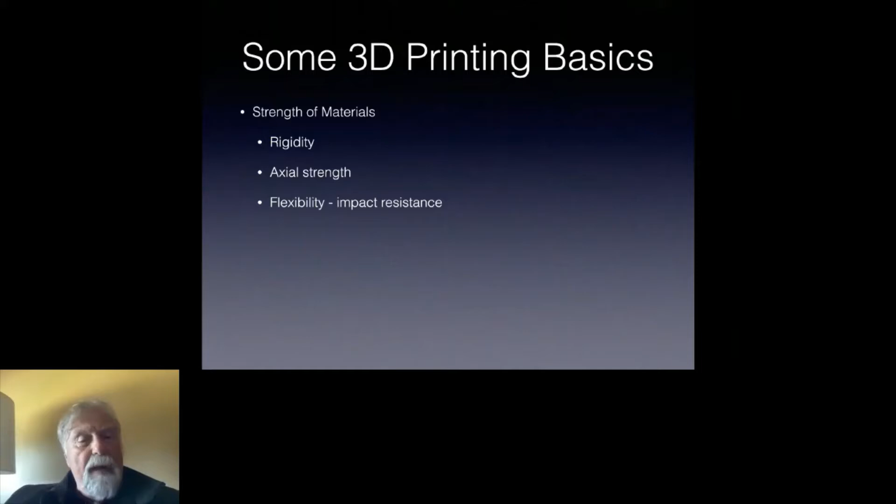So some 3D printing basics. Core of it that I've learned is strength of materials, particularly about the rigidity, particularly axial strength for rocketry, and then lastly, flexibility for impact resistance when they inevitably come down.

Second key issue is the glass transition temperature, which is the temperature at which we see the beginning of heat deformation and the loss of structural strength. Key to this is material selection.

One of the insights that I discovered in my research, and getting myself less stupid about this, was that for many of our easily accessible materials, the glass transition temperature is about the same as that of the epoxy resin we use in our fiberglass and carbon fiber composites, which means we can use these advanced plastics in many of the same places, modulo strength, that we can use fiberglass and carbon fiber.

And last, there's some fascinating things we can do with tuning the slicing parameters. I'll talk about slicing a bit later.

So my 3D printing experience - first of all, I am not a mechanical engineer. I've just done this for 30 years, and I'm a very technical person.

So I started this experience with a low-cost printer, and what I found is that it was too much work. The printer became the hobby rather than the tool for the hobby I was doing.

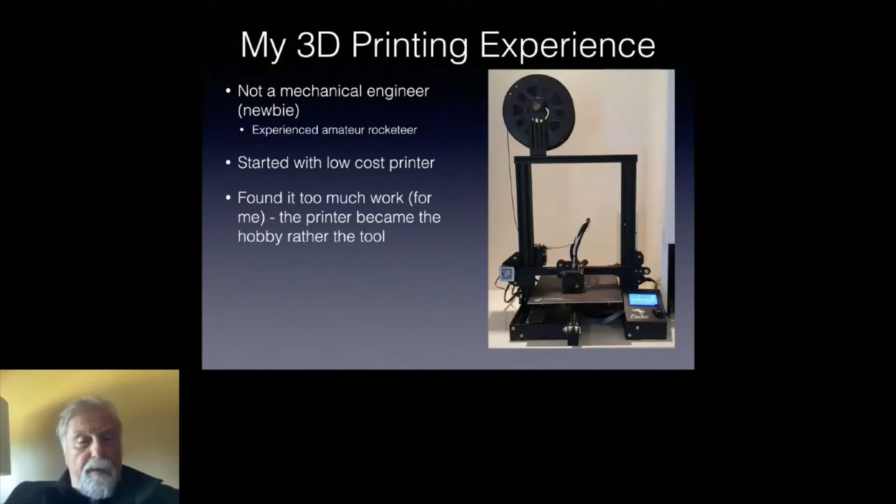So I upgraded to a more thoughtless printer, more expensive, that prints stronger materials. This in case is a Dremel 3D45, in which I can print things like ABS and PETG and nylon. And I particularly am a fan of PETG.

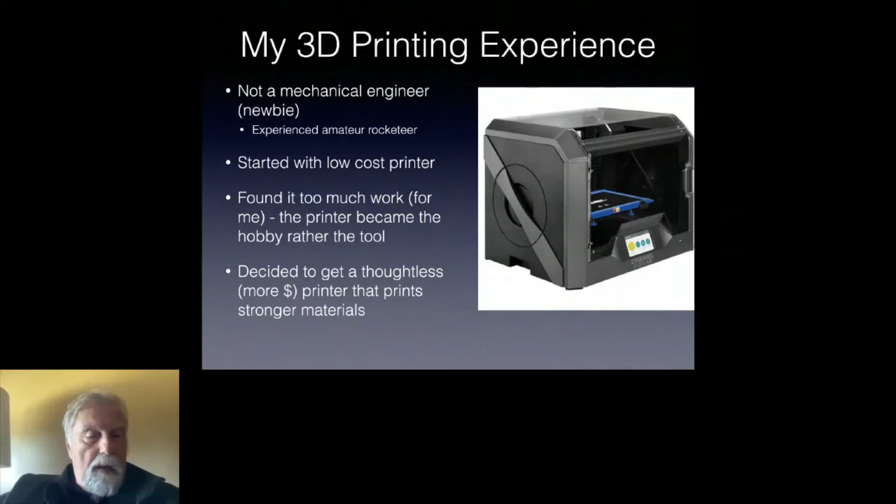And then I have a gracious spouse, so particularly in COVID, when my house gets filled with 3D printed rockets - this is a portfolio of about 1/150th scale of just about every commercial rocket that's been around. I'm particularly proud of the N1.

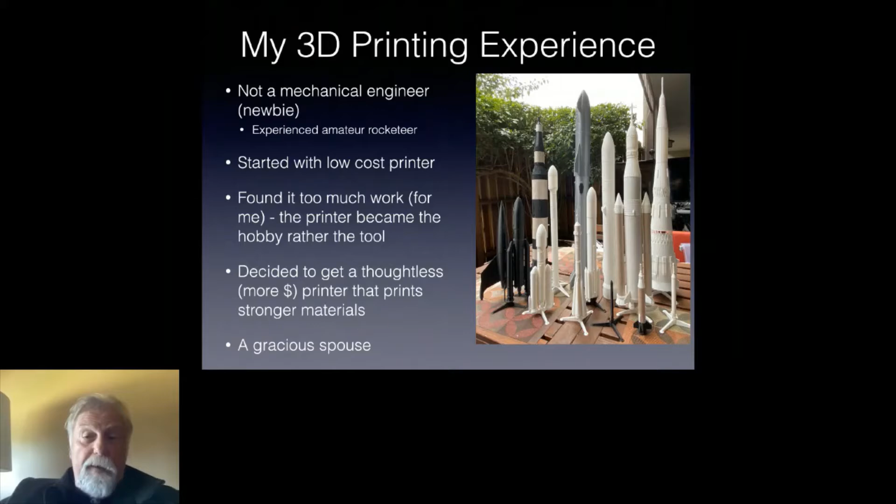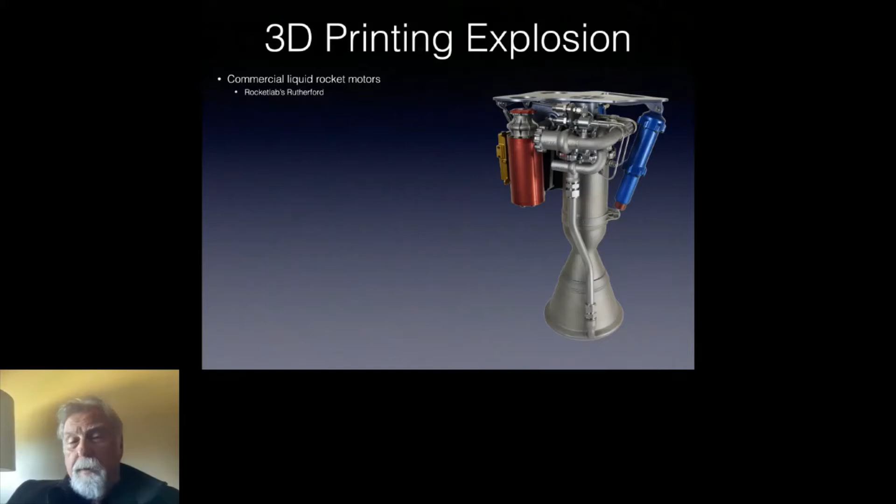So 3D printing explosion - it's here. We're now seeing commercial liquid motors that are completely 3D printed. This is Rocket Lab's Rutherford motor.

We see entire commercial orbital class rockets that are being essentially entirely 3D printed. I particularly point to Relativity's Terran 1, which has not yet flown, but should - my understanding is it's about 90% completely printed, and we're looking to think about a first flight soon.

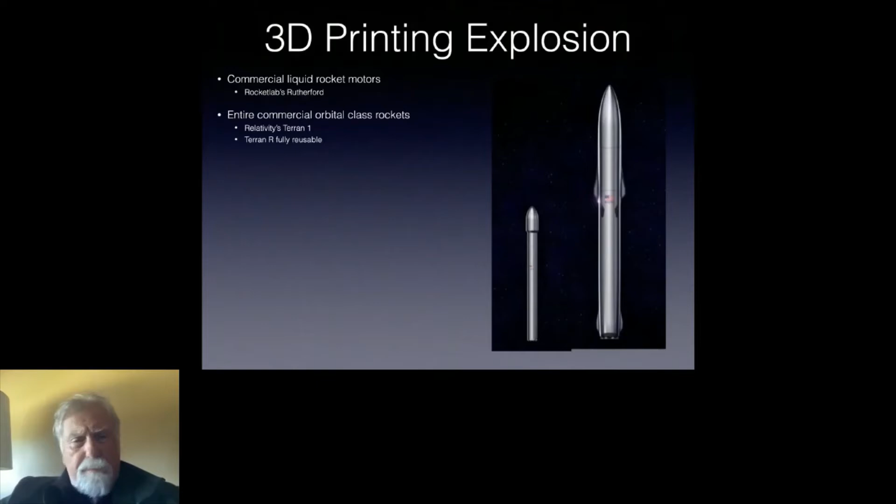They've already announced a successor product, which will be the Terran R, which is, as you can see, about a 50% downscale clone of a Starship, a SpaceX Starship. And they assert that they're going to completely 3D print that as well.

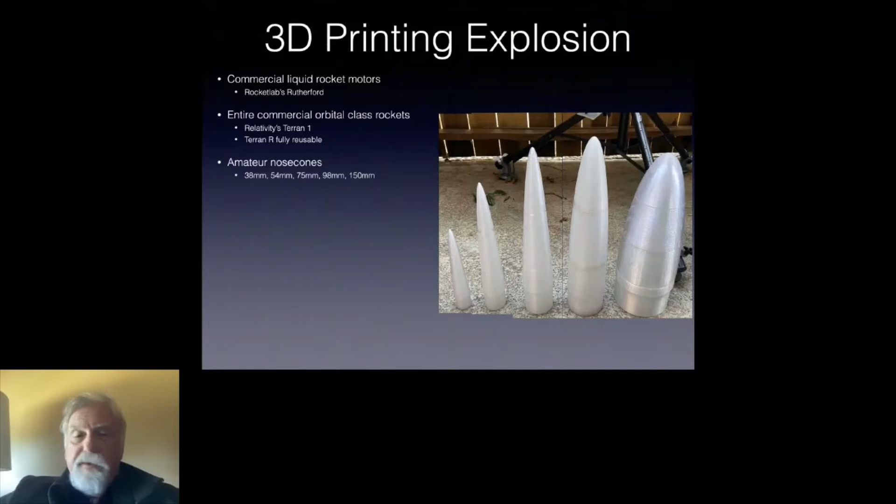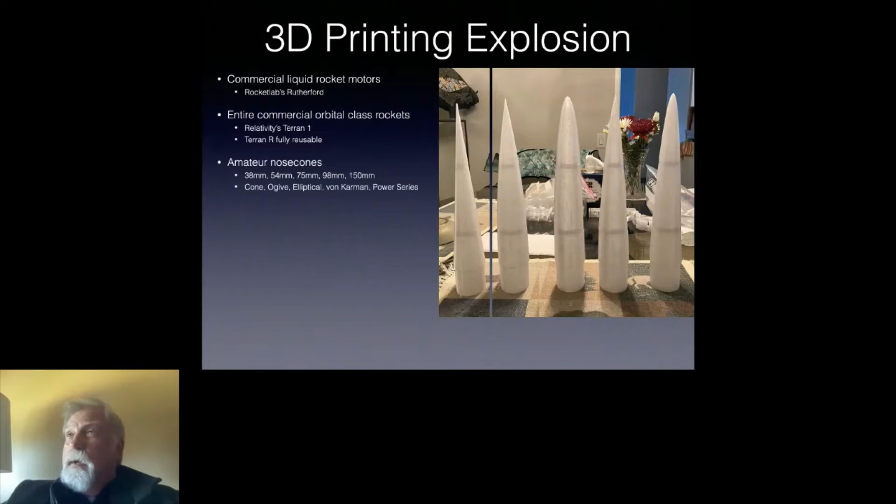For me, I'm finding that I can print amateur nose cones of any size that I want - a portfolio here of 38 millimeter up to 150 millimeter. I can print them in just about any shape that I want, so I can pick the shape appropriate to the drag environment of the flight profile that I'm looking at.

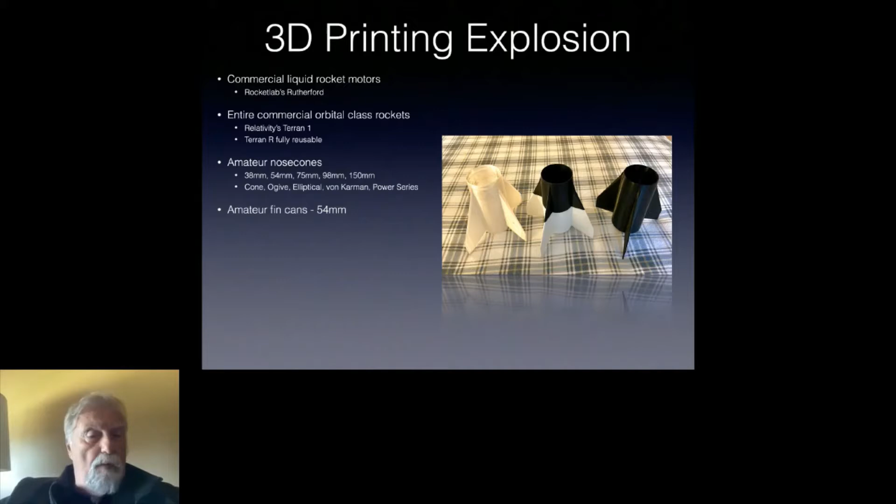You can build avionics mounts, and that's probably the first thing that people have been building with 3D printing. These happen to be high performance ones - these are the 3D printed mounts for our ARLO Extreme sounding rocket that's really targeted in the 150 to 180K range, Mach 3.5.

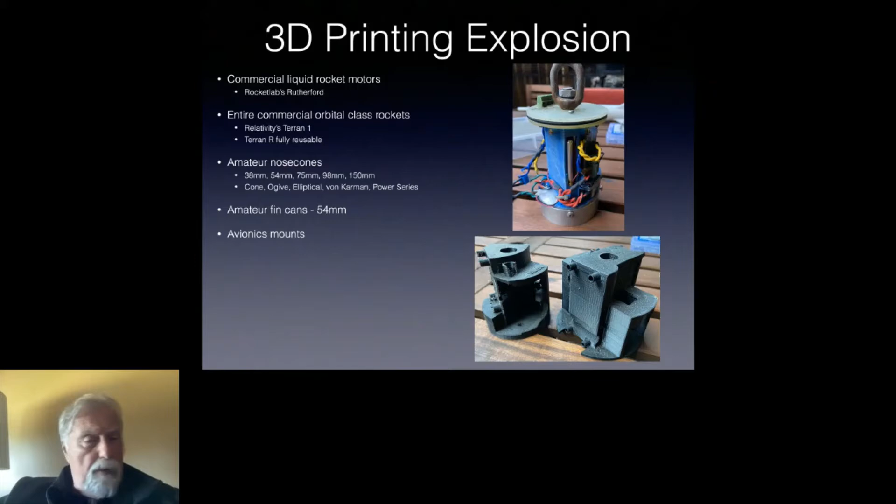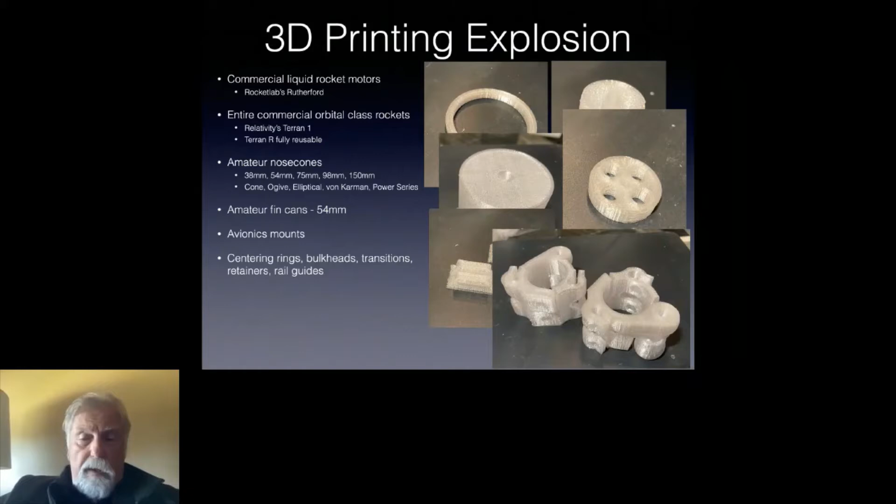You can build centering rings, bulkheads, transitions, rail guides, and I'm fascinated - in the lower right there you see a wonderful design for a flyaway launch system. This is my test bed for kind of Mach 2.2 plus flight, looking to instrument to measure interesting things about temperature and strength.

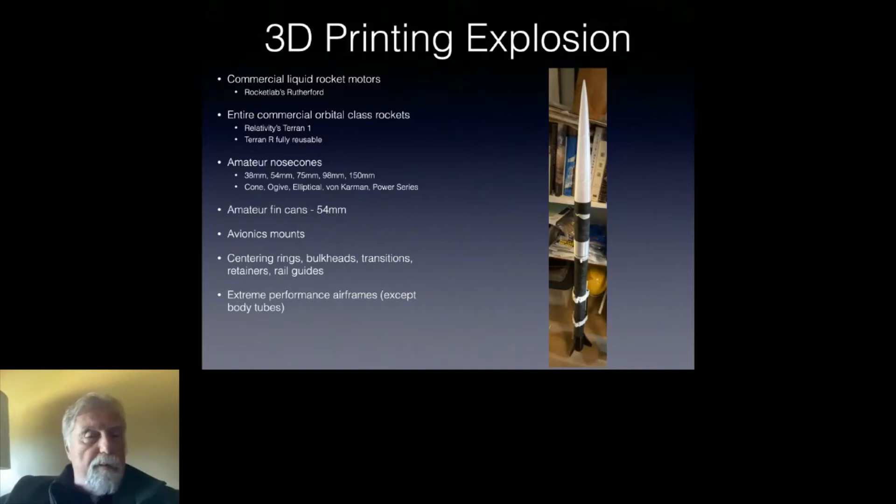And then you can build crazy things, like I found a design that someone had done for a 24 millimeter motor mount for a lunar lander. And of course, once you can do one size, the cool thing is you now can scale them to all other sizes. So that's kind of been a COVID hobby, shall we say.

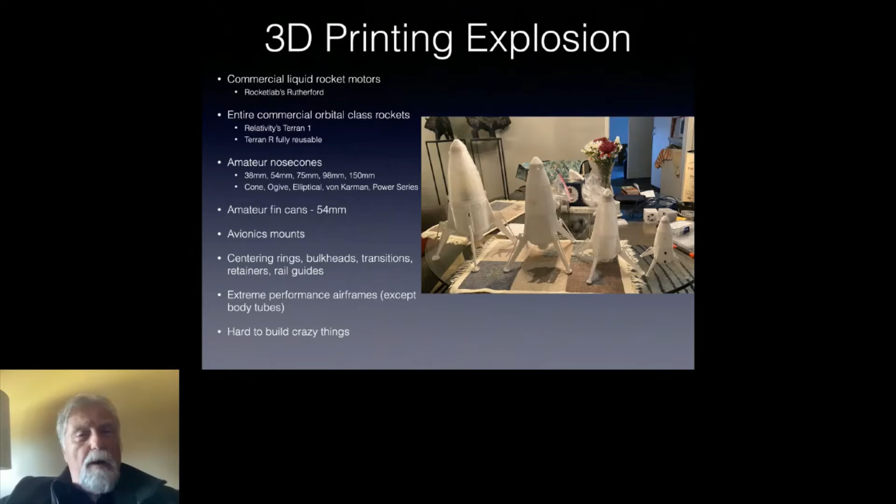So the core technology accessible to amateurs is called fused deposition modeling. You can see hopefully a video on the side of my printer physically printing out a complete airframe, and it does it by layers of extruded plastic.

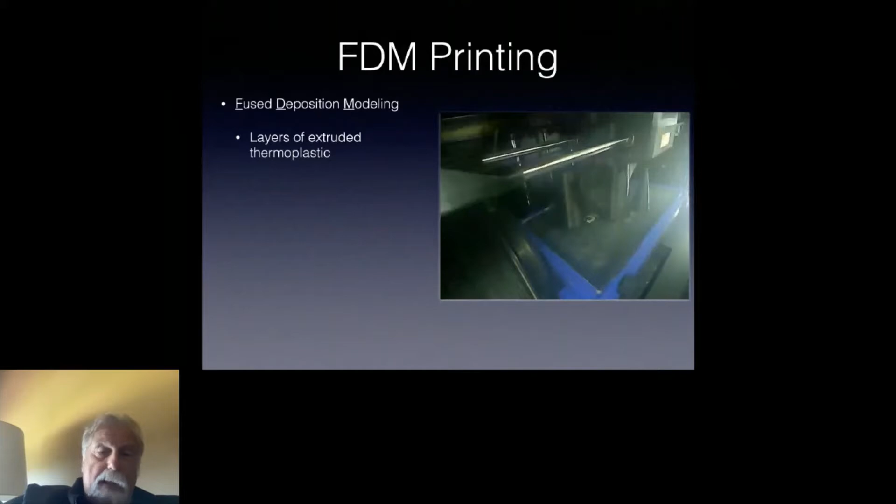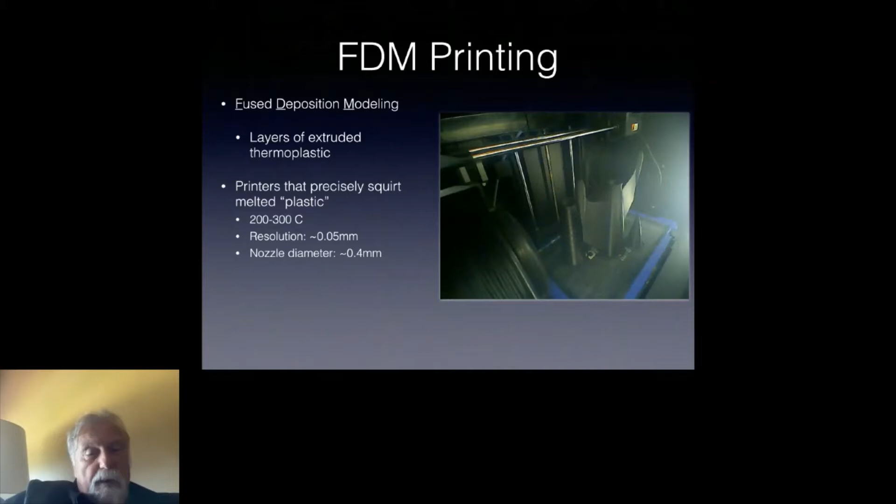You can see the print platform moves in the Z direction, and the print head moves in the XY direction to essentially print extruded thermoplastic. The plastic varies in materials, generally between 200 to 300 degrees C at the print head, with a resolution on the order of 0.05 millimeters, with a nozzle diameter, so a feature size of about 0.4 millimeters.

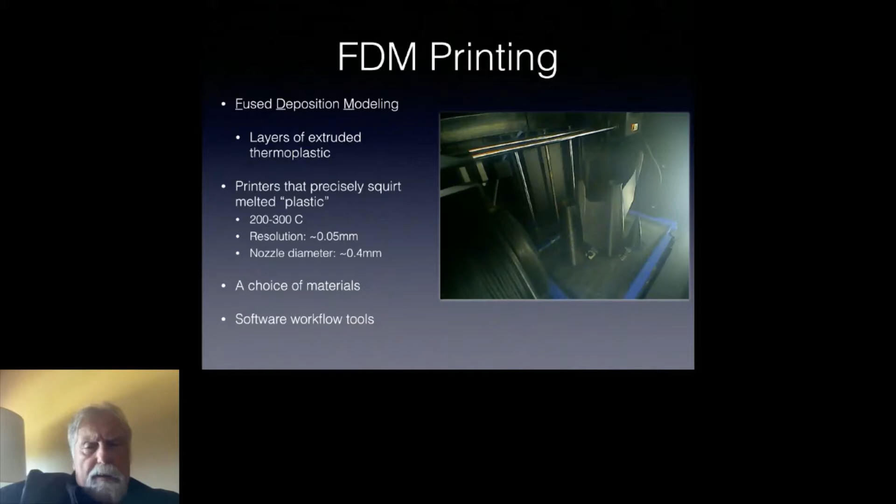There's a huge choice of materials - I want to talk about that in a moment. And there is a robust collection of software workflow tools that allow us to build, like we do doing software development, to build a system from imagination out to concrete parts.

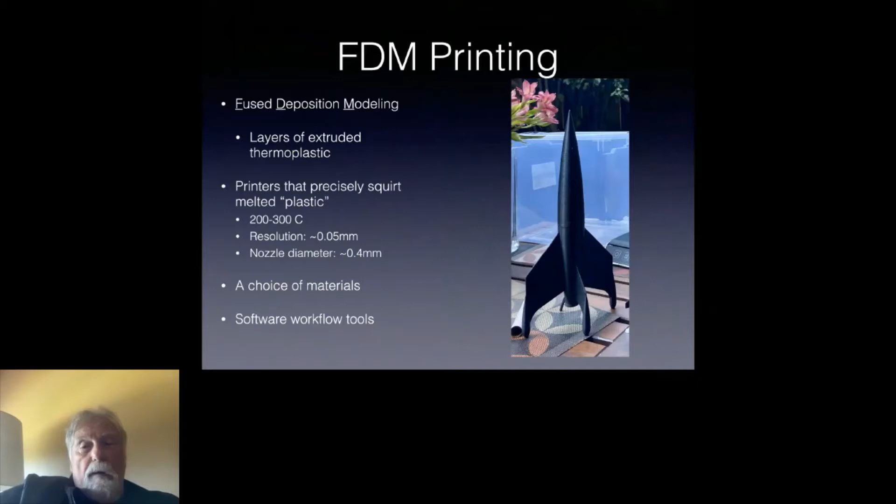And that was the rocket that was just printed, which is roughly a 1/150th scale model of the famous Luna from Destination Moon. So the materials are the key issue - now, much of 3D printing, at least when I first was a naive person, was just simple plastic, PLA.

I don't find PLA particularly useful. Rather, I think there are some amazing materials. I'm particularly a fan of PETG, ABS, what's now called PLA Plus, nylon, and polycarbonate that can be printed in generally reasonably accessible printers. These, I think, are widely useful in a variety of rockets up to and including some parts in even L3 rockets.

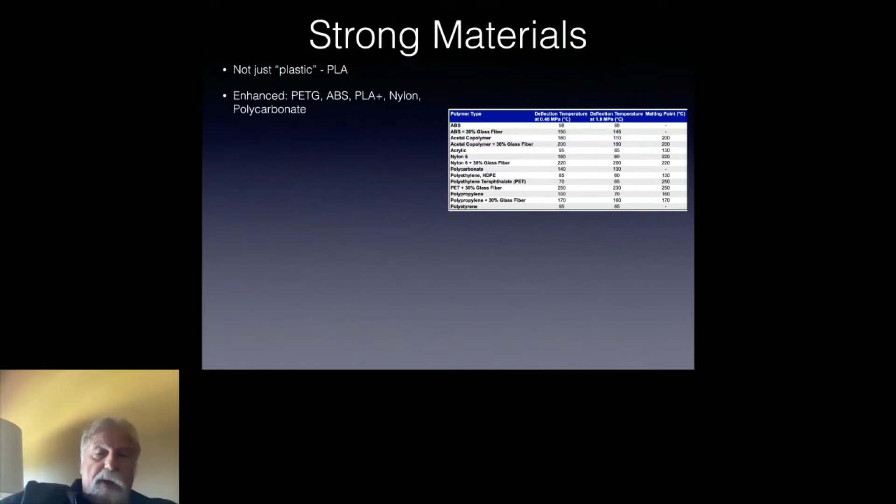What's even cooler is we now have reasonably accessible materials. I'm particularly a fan right now of Onyx, which is a proprietary material from a company called Markforged, which is a nylon base with chopped carbon fiber, and optionally you can add continuous carbon fiber. Their measurements suggest that they're approaching strength, certainly in certain axes, that is kind of on the order of aluminum. And of course, for aesthetics, you can find materials that are impregnated with wood, metal, colors, fluorescence.

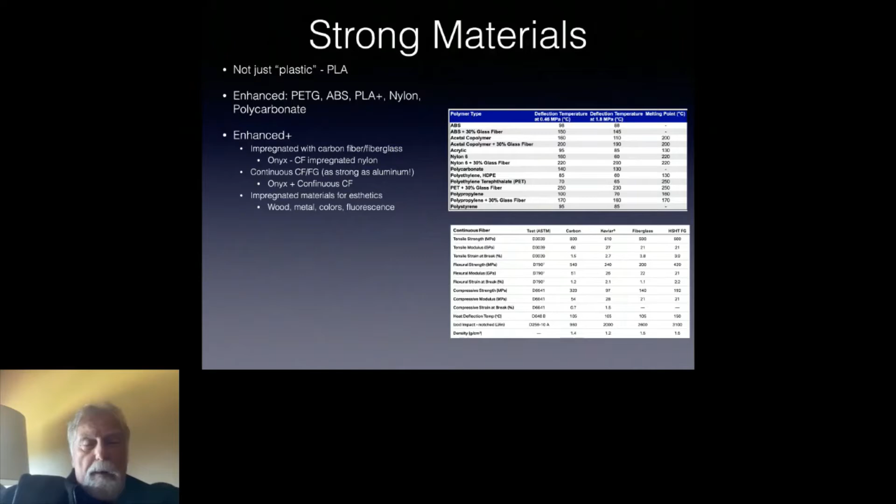I'm sure there are things I don't even want to think more about. We can find flexible materials like TPU that allows us to build gaskets and shock mounts. I've used this to build gaskets for a waterproof outdoor telescope.

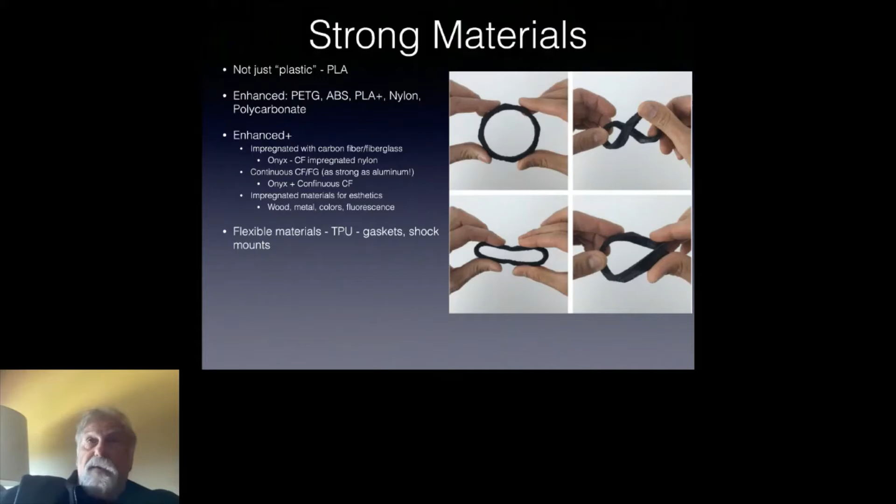We can use the same design in essence, but scaled up using laser sintering of carbon fiber in a product called WindForm, which allows us to take our designs and be orbital capable. So we can take a design that we build to launch on the ground, either at something like Spaceport America Cup or my launch of ARLO, and then scale it to put it into orbit.

Since most of the electronics are now, particularly for LEO, we can use commercial grade electronics. The payloads on the bottom, the circular one to the upper left and the central one at the bottom, those are payloads that I put up about 3 years ago. They're made out of WindForm.

The payload on the top was a test payload for LEO using LoRa, the new communications protocol. That was carried in a carrier. The carrier is at the bottom, and it deployed 2 of these essentially CANSAT-sized systems when launched off the ISS.

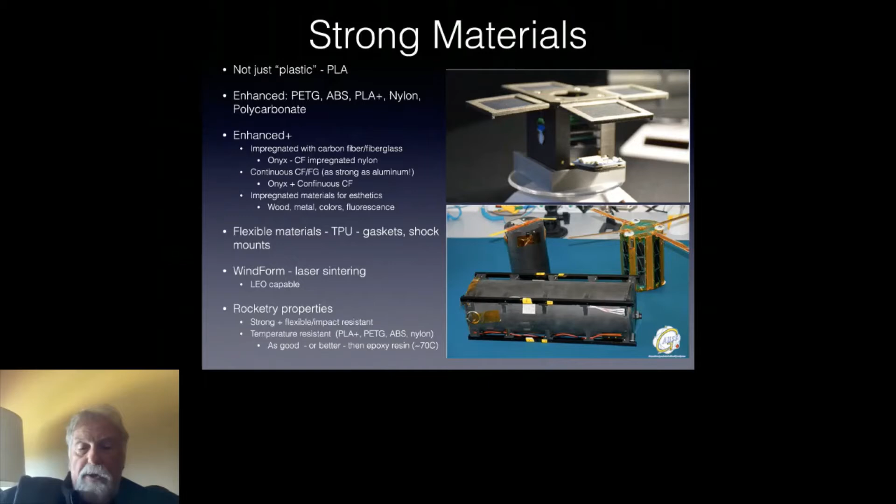So what have I learned about looking for rocketry properties? You want to be strong, you want to be flexible and impact resistant, and you want to be temperature resistant, at least to the same degree that our epoxy resins are temperature resistant. What I've discovered is that there are a number of these: we can use PLA+, PETG, ABS, nylon, and they end up being as good or better than epoxy resin.

What are the limits? Well, it's generally heavier than balsa wood and paper, so at the very low entry level of beginning rockets, it's going to be heavier than what we've used for wood and paper, but it's ultimately lighter than fiberglass. I find that I'm bounded by the print volume, and biggish objects must be printed in pieces and then use adhesive to bind them into a bigger piece. I think that's ultimately a weakness, but I haven't yet been able to fully explore that.

I think some of the materials, I'm going to talk about our advanced project in the area that crosses into the strength of aluminum, but for many projects, PETG, I think, is good enough, as I said, for temperature resistance, and I think for strength.

One of the challenges is that most of the printers we have take a long time. So that 54 millimeter print can I showed earlier can take a day. And we're now printing in Onyx with continuous CF, a two-stage interstage that will stage at about Mach 1, and the upper stage will go to north of Mach 3. That interstage will take a little over 2 days.

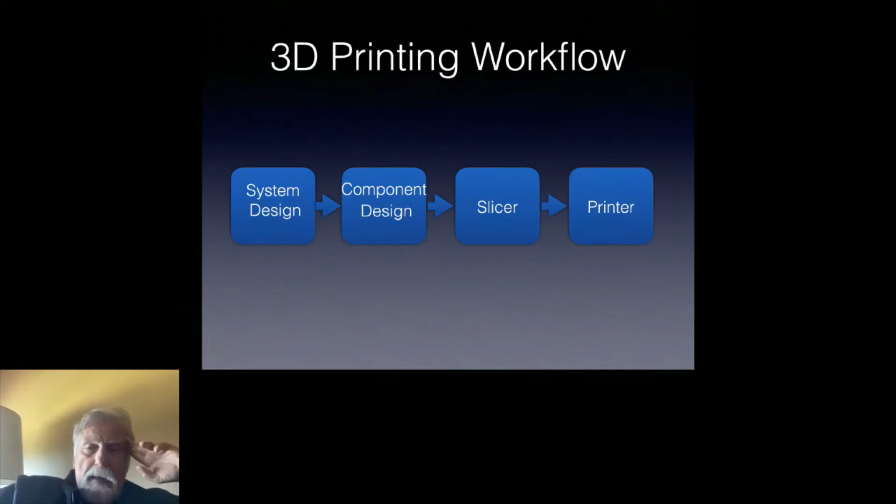So what's the workflow? Like in many of these systems, we start with a system design, and we have a set of tools for designing the complete rocket and the complete system. That then breaks down into looking at individual components - centering rings, fin cans, nose cones. We then take those and put them into a step called a slicer, which takes the 3D object and slices it into horizontal layers that can each be printed by the printer. Then we ship that object description to the printer itself, and we iterate until we quickly find ourselves with something that we like in fit, strength, and function.

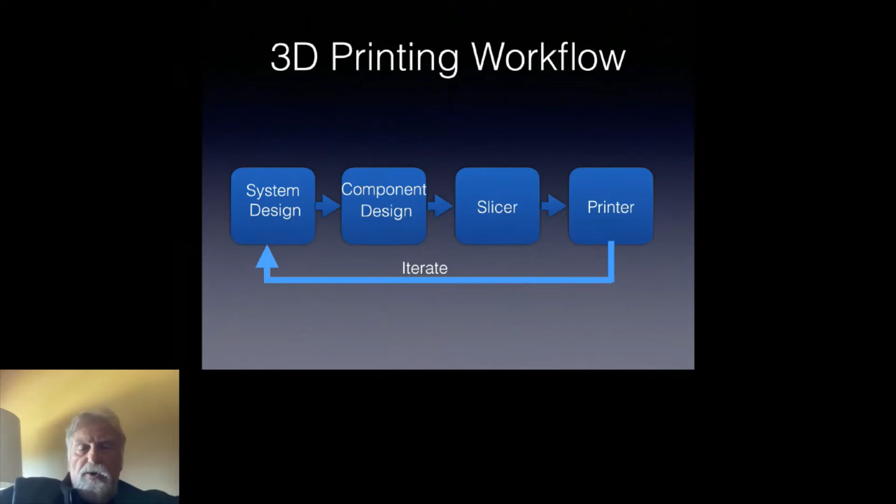So for many of us, many of our students are using OpenRocket, mostly because it's free and it works reasonably well. It has decent simulation accuracy, and it has a decent model for drag, particularly transonic.

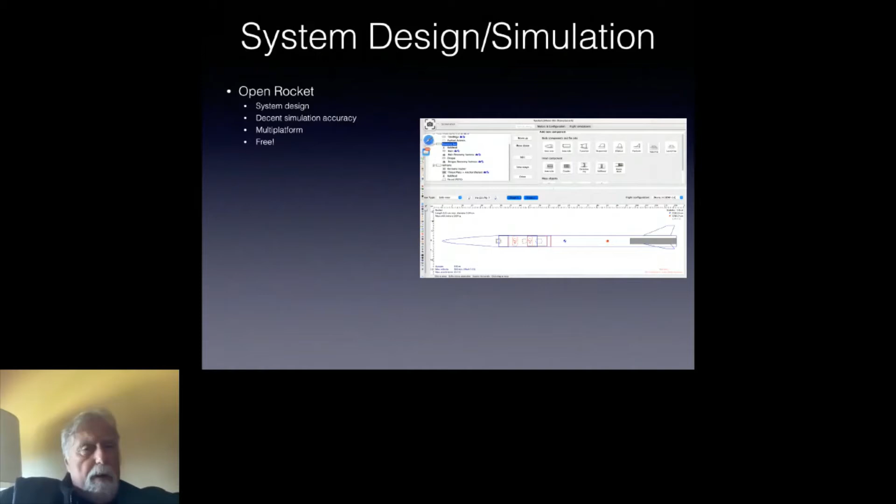The legacy system is RockSim, which I find has poor simulation accuracy. But when you use the product that's sadly no longer supported, which is RockSim Pro, you can add in good drag models.

And it does a really good job of making 6DOF simulations with dispersion diagrams that are really good for FAA.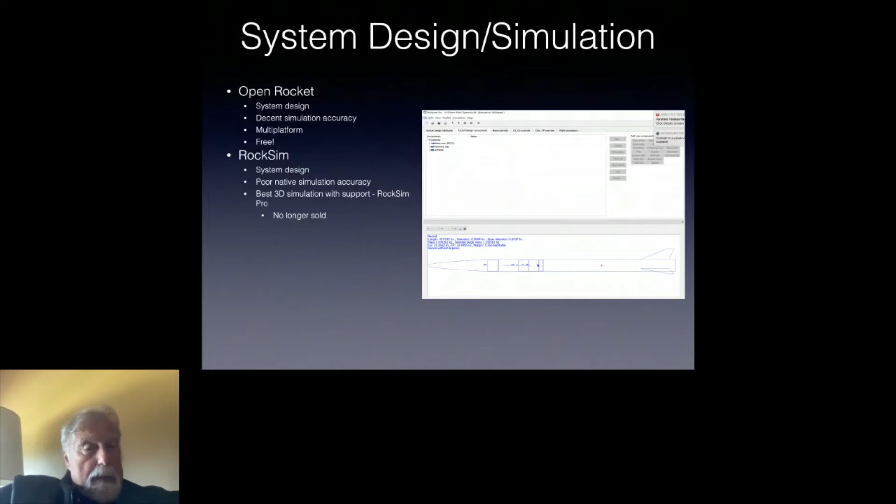And lastly, there is RAS-Aero, which all of us know has kind of an antique UI design, but it has great 1D simulation accuracy and a very good set of drag estimates for most rocket designs.

Sorry, I couldn't hear. Siri is talking back to me, forgive me.

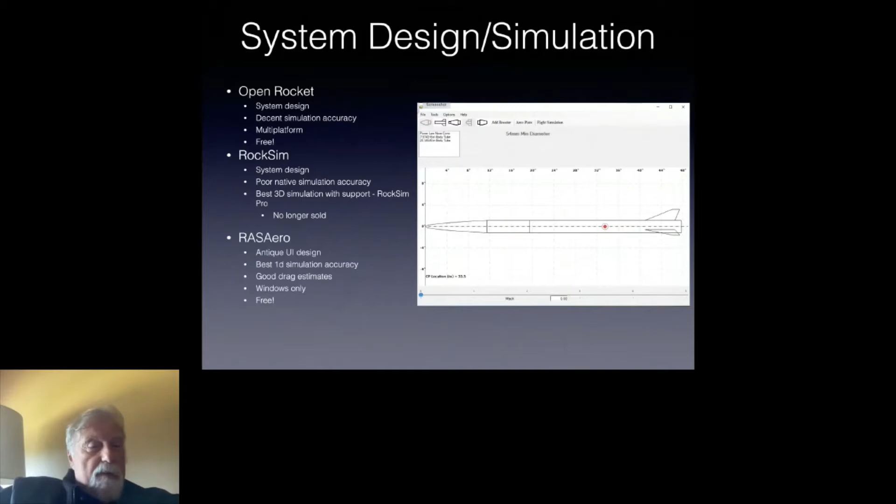And it has a good value in that it's free.

And then lastly, I'm just beginning to put myself into using Fusion 360, mostly because I want to be able to export and do CFD designs.

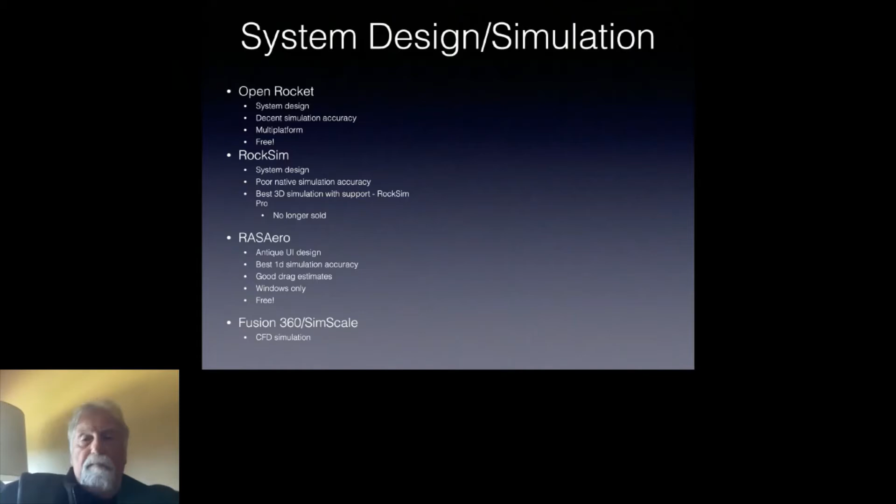Component design creates the fundamental shapes. And so I found that I like to borrow from the best.

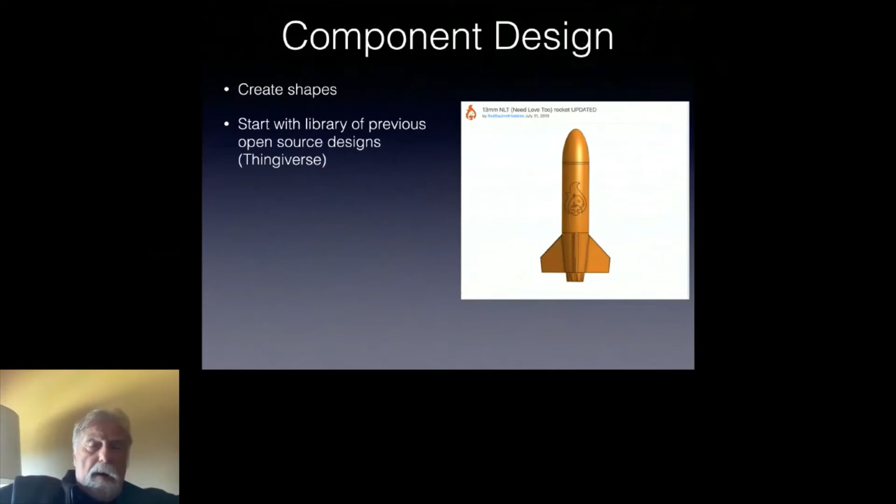I find Thingiverse is actually a very good source of some existing components. This happens to be a 13 millimeter little rocket that is great for teaching in grammar school, which I've gotten off Thingiverse. You can now look at new component design.

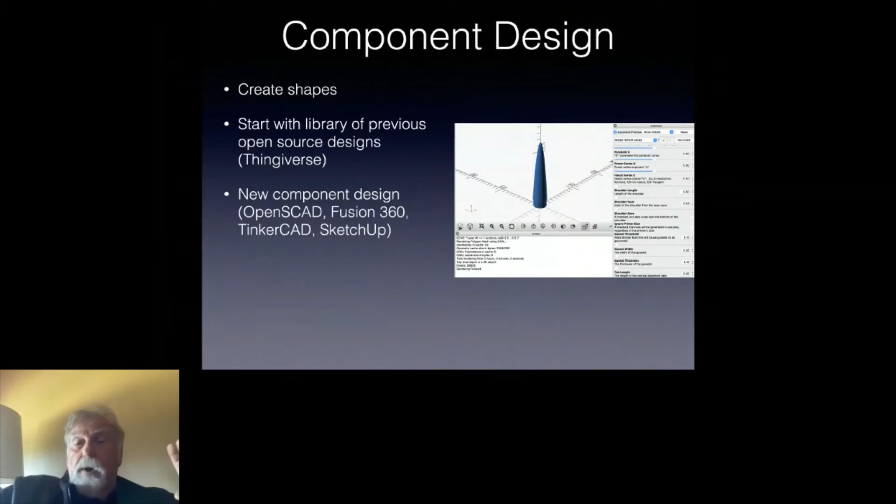I happen to like OpenSCAD and Tinkercad a lot, and you can design a new nose cone. We've now taken that new nose cone and ported all those pieces back into Tinkercad, and now we have all the component pieces of our rocket.

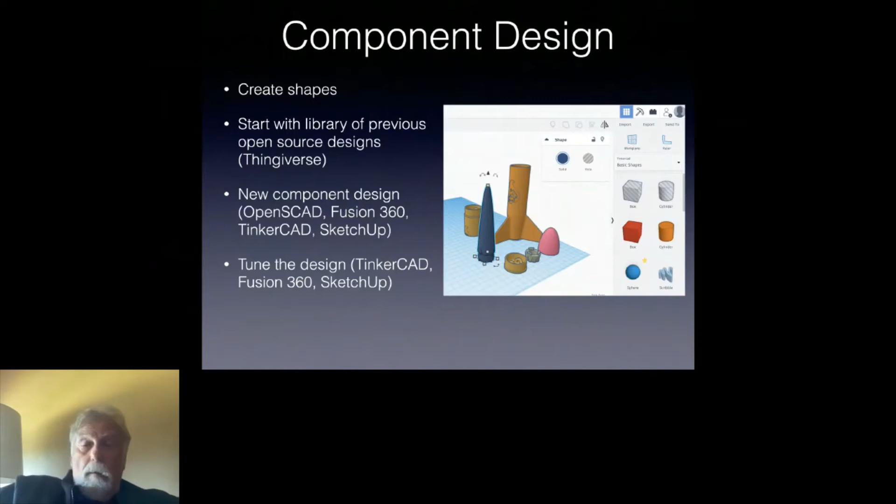We then export those as a .stl design file that will take us to our slicer. Our slicer, as you can see in the animation, then converts our shape designs into printer instructions.

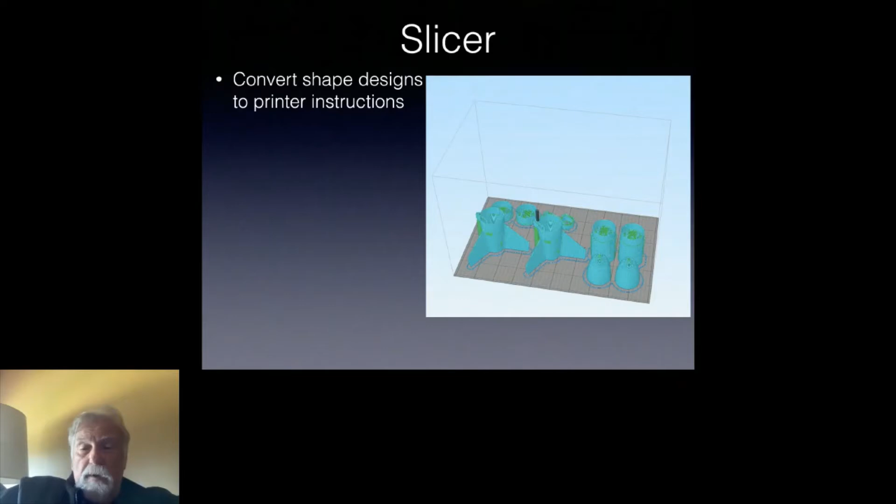It layers the horizontal layers and builds them up, like a compiler for programming is my best analogy. And so here I'm building two of these little rockets.

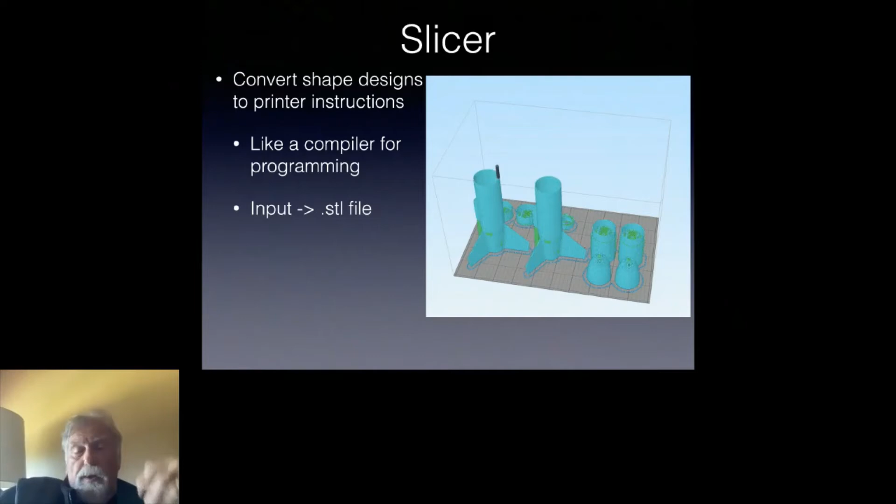The input was a .stl file of the shapes, and the output is a .g-code file which will actually go to the printer. Cura is a very popular slicer. I happen to like Simplify3D.

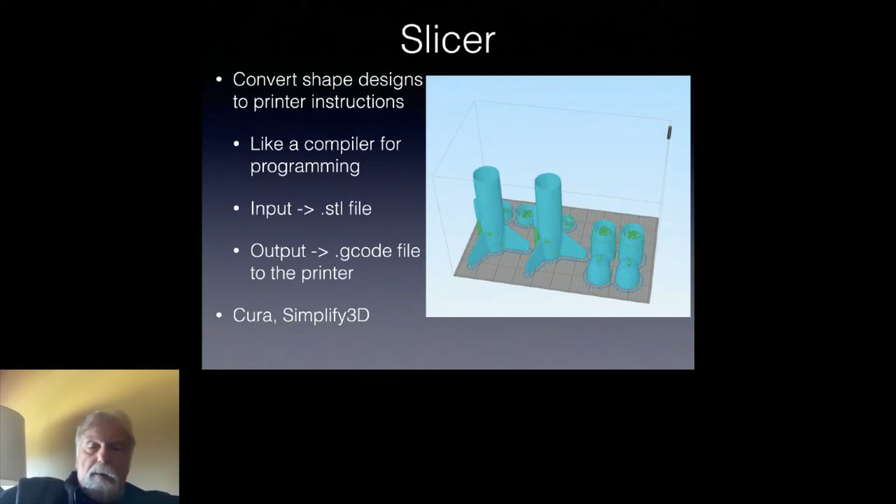So printers, there's a huge wide range of capabilities and prices, and I urge you to do your due diligence as you think about them.

I'm going to talk about really three ranges. The beginning one is at roughly $300 for a Creality Ender 3.

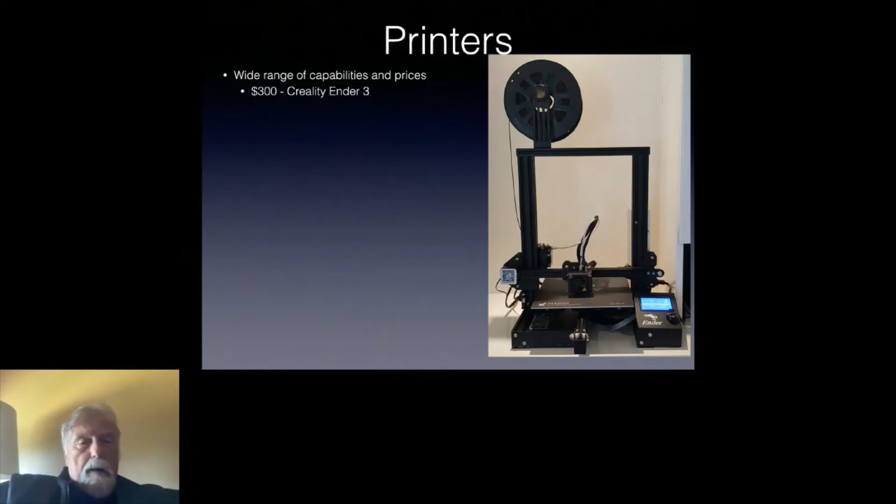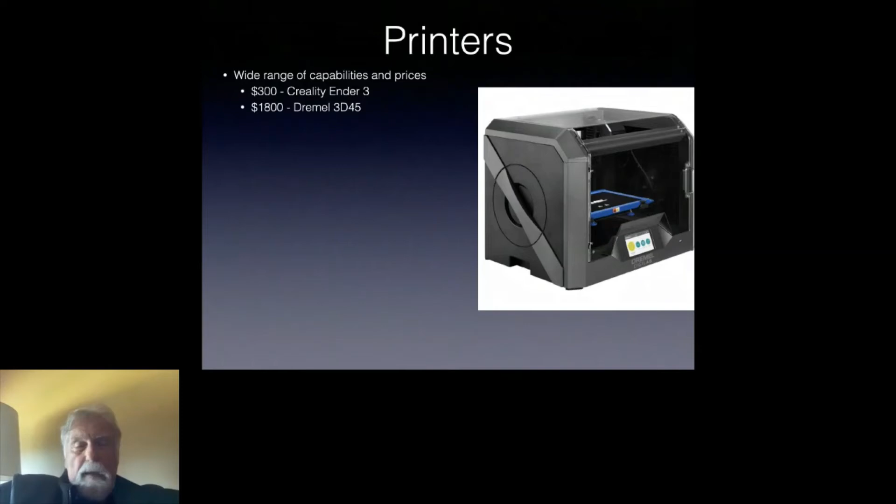And I've then moved up to a Dremel that I really like. It's thoughtless, it works, it's highly reliable, highly accurate, and has a good selection of materials.

And then with my partner, John Coker, we're now looking at and using MarkForged, which begins at about $4,000 going up to about $10,000. We're looking at nylon and continuous carbon fiber, with a strength profile that begins to look a lot more like aluminum.

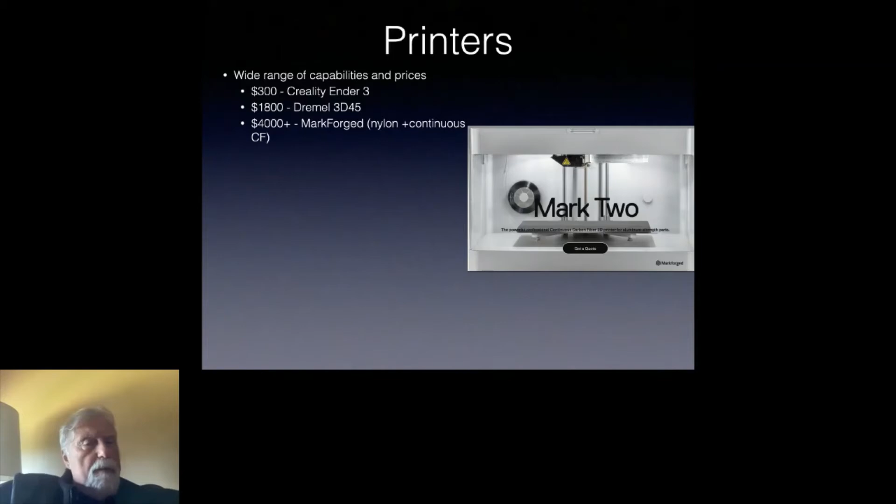And so, some desirable rocketry features. You see the printer here printing those same little rockets.

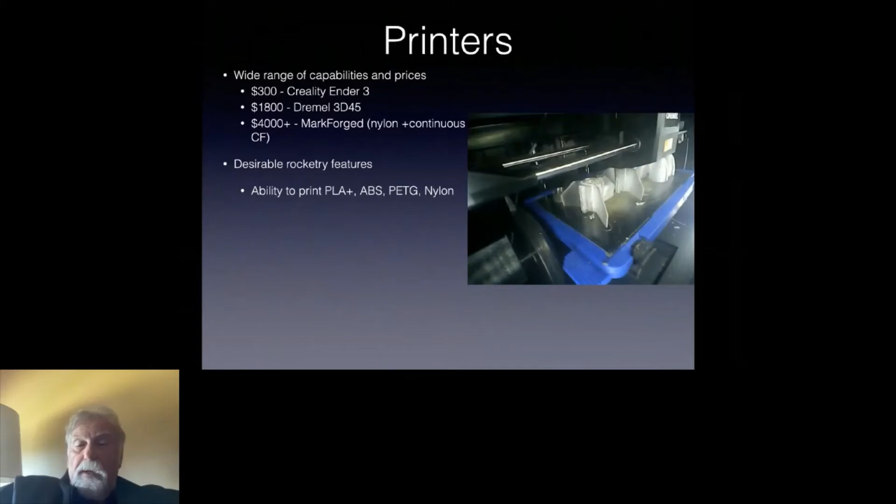The ability to print PLA plus, ABS, PETG, and nylon, I think, is really important, and I would use any of these materials in selected different places.

I would look to have a maximum nozzle temperature at about 300 degrees C. I think a heated printing bed is really valuable, up to about 100 degrees C.

And an enclosed build chamber really reduces the noise and helps keep a more even temperature as you are printing, which helps bonding between layers.

Key thing is the print volume, and the maximum I've been able to print in my printer is 150 millimeter nose cones, sliced vertically, because the length of the nose cone is longer than the build height.

I really like the feature of a self-leveling print bed. Having done both non-self-leveling and self-leveling, I really love the fact that it kind of takes care of itself.

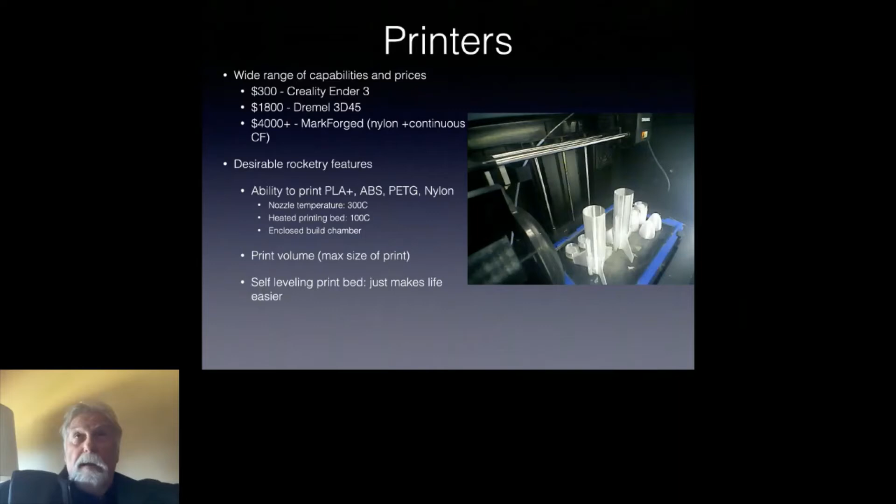And lastly, my printer is network enabled, so with friends and students, I can let other people get access to the printer's website and submit jobs for printing.

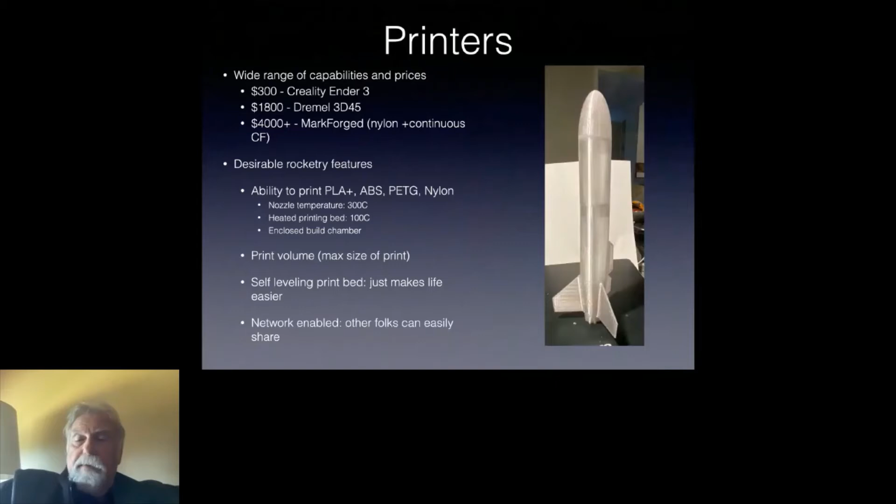Consumables cost. The key cost is a roll of filament. This happens to be a 1 kilogram roll of PETG. I happen to like the brand Overture.

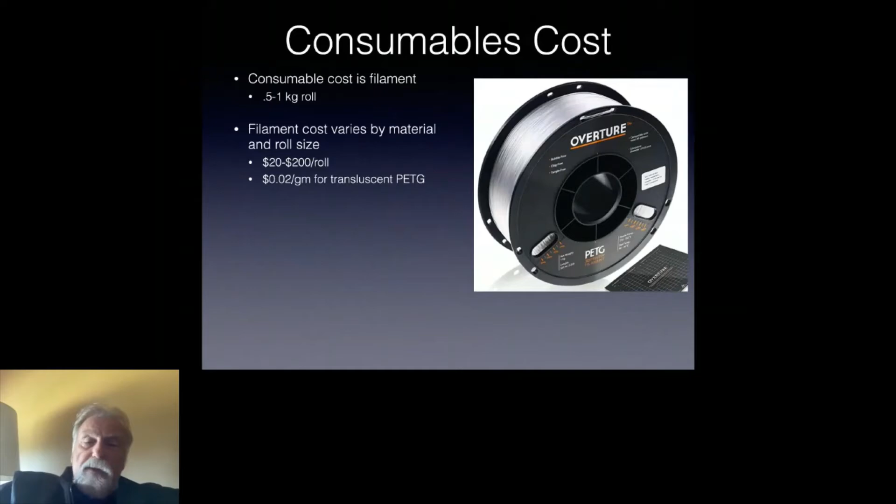Filament cost varies by material and roll size, going anywhere from about $20 up to the MarkForged Onyx material at $200 a roll. But for translucent PETG, as you see, it's about 2 cents a gram for the printed model.

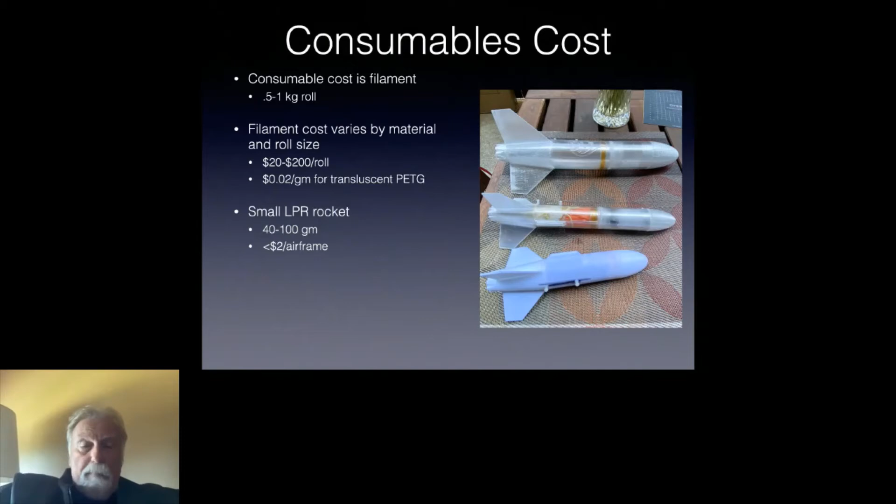So for less than $2, one can print a small low power rocket like the ones we have at the bottom, either payload or not payload, with 40 to 100 grams of material.

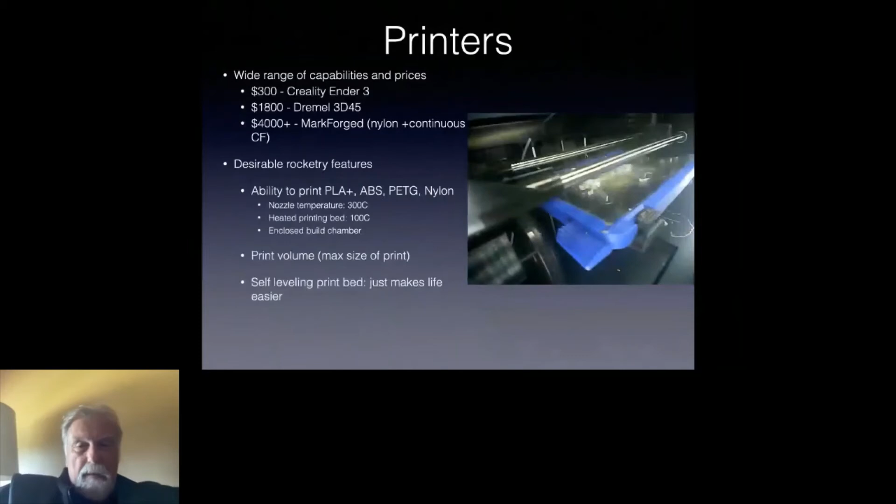Or we can build 54 millimeter HPR nose cones that are, I think, Mach 2 capable, for on the order of a couple of dollars.

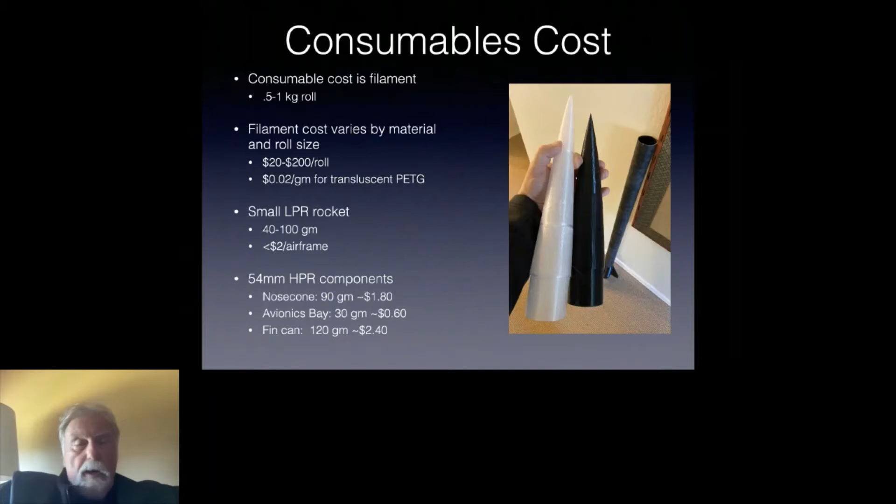So what are some examples of the things that we can print?

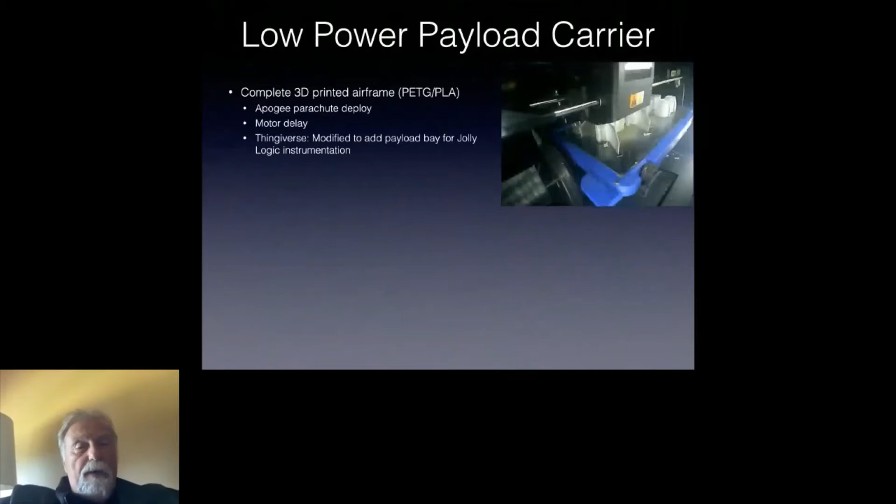Here's an example I'm printing in PETG, though I think it's low power enough you could print in PLA. It uses an Apogee parachute deploy with a motor delay. I got it off Thingiverse and modified it to add a payload bay capable of Jolly Logic instrumentation. This is a payload rocket that can fly an instrumented payload a few hundred feet, teaching students to analyze performance data and the fundamentals of rocket physics. I've modified it to fly off a micro rail as well as a rod launch.

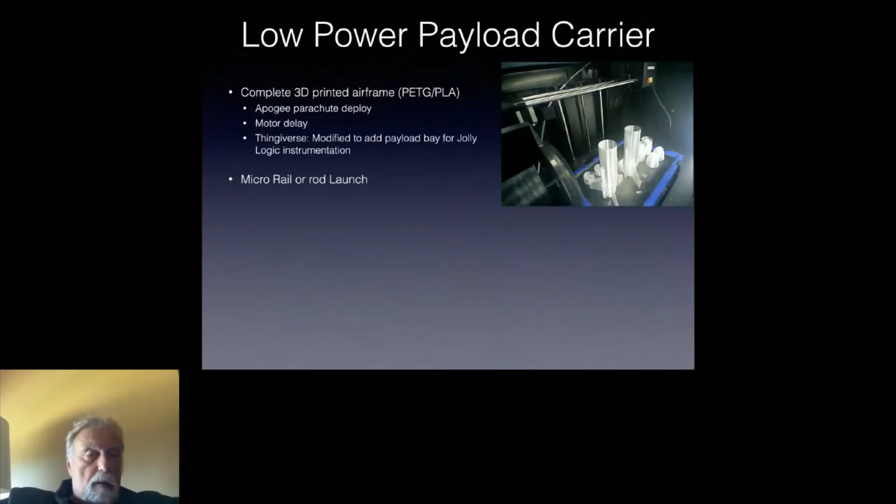On an A10 motor, you can go to 100 feet. And if you do the 18 millimeter version, you can go to 1,000 feet on a C6, carrying a payload.

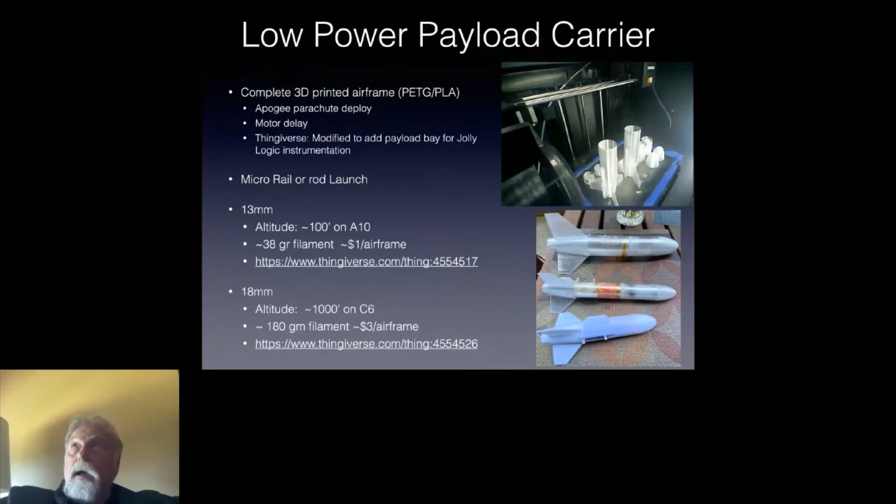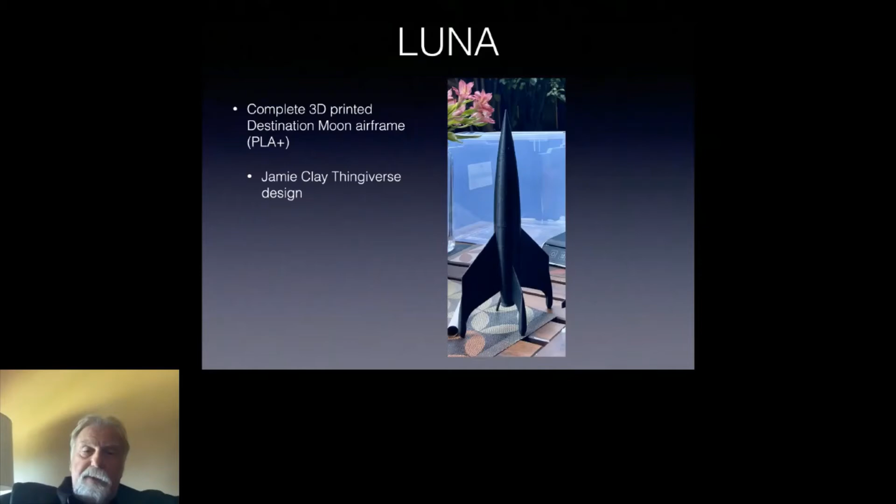I really love this rocket. It was designed by a friend of mine, Jamie Clay. I took his design and printed it in PLA Plus, and also in a proprietary Dremel material called Eco ABS—similar strength to ABS, but without some of the toxicity and recyclability issues. It has an 18 millimeter motor mount and flies off a micro rail or a rod.

Mars lander. I would never have imagined building one of these because it's just too much work, being the lazy person I am. So I've built a bunch of these in 3D printed airframes using PETG. It started with a particular Thingiverse version in 24 millimeter.

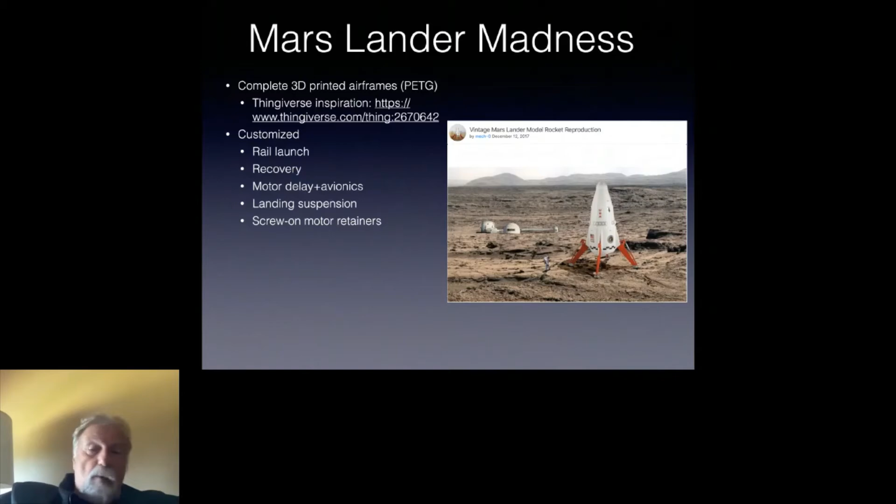I've customized it for rail launch, changed the recovery, added a version for avionics recovery, and updated the landing suspension with better springs and screw-on motor retainers, making it a one-stop shop. And of course, once you do one, you can do lots, as I pointed out earlier. Now I just need the time to fly all these—would be cool.

One of my projects, which I'll talk about after this regarding ARLOS, is a version called S4—small satellites for secondary students. It essentially looks at PocketQubes, which are 1/8 the size of a standard 1U CubeSat. A 1P is 5 centimeters on a side, and these essentially replace what we used to think of as CanSats.

In my S4 design, you get a standard platform using a high-end ARM processor and lots of sensors, printed in a 3D printed package. Sensors include the usual GPS and IMU, but also ozone, gamma ray spectrometer, visible light spectrometer, aerosol spectrometer, as well as the old standards of pressure and humidity, with LoRa telemetry.

It's good on a small rocket—you can fly it to 1,000 to 3,000 feet. Or you can put it on a sounding rocket, like a big ARLO rocket that we fly out in the desert to 150K feet. Or it could be good to LEO.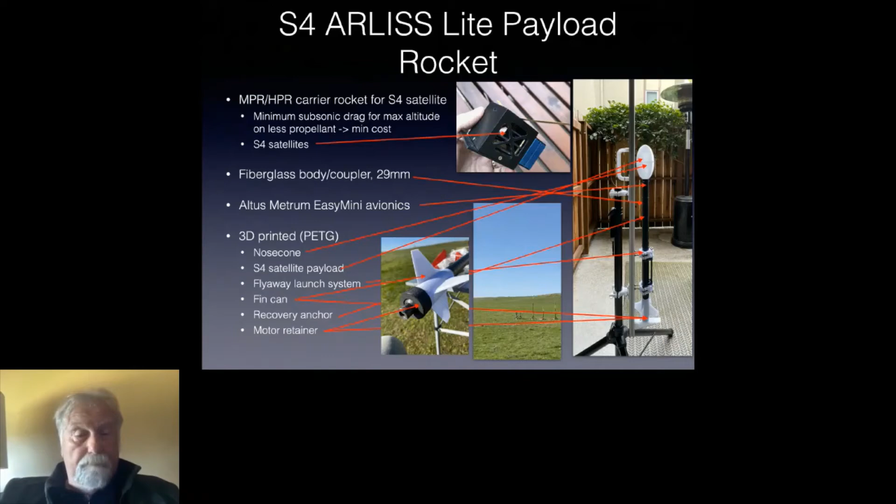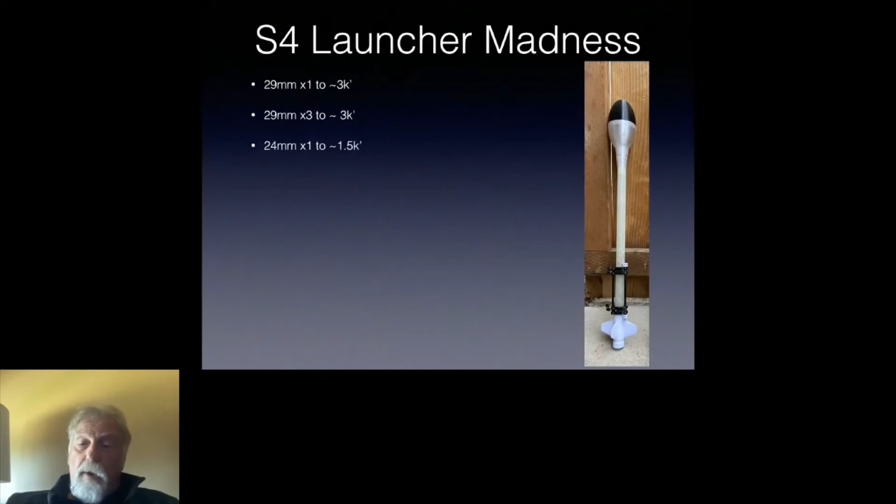So once you can build one at 29 millimeter, you can build a bigger one by adding 3 satellites that can fly to roughly the same altitude, because the drag profile doesn't change much once you've optimized subsonic drag. Or you can build a smaller one to fly on smaller motors if you don't want to use an adapter. Or you can build it bigger.

And what we now can begin to think about is deploying massive swarms of communicating satellites and prototyping building swarms in which each one may have different sensors. They may have overlapping sensors. We may be able to think about doing sensor integration, so it brings up a whole new set of advanced sensor methodologies.

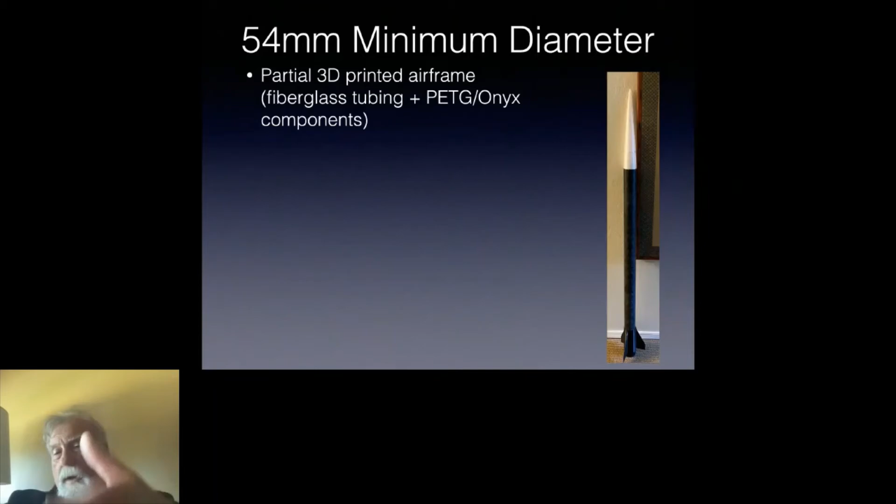This is our prototype that my friend John Coker and I are prototyping. We are building them in both here on PET-G, and he's building one in Onyx. Common fiberglass, same platform. We'll be instrumenting the nose cones to measure temperature and pressure at the nose cone tip.

And most of it is 3D printed. And we think it gets about 20K on an L motor and probably about Mach 2.5, 2.2, something like that.

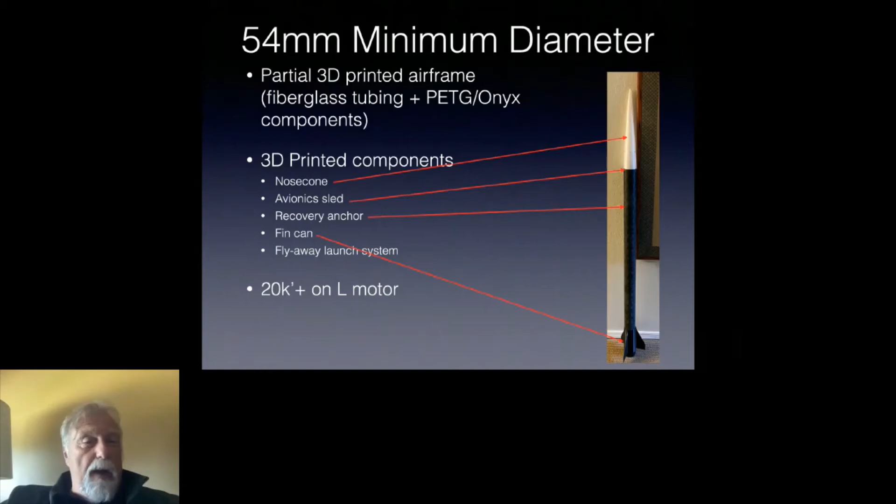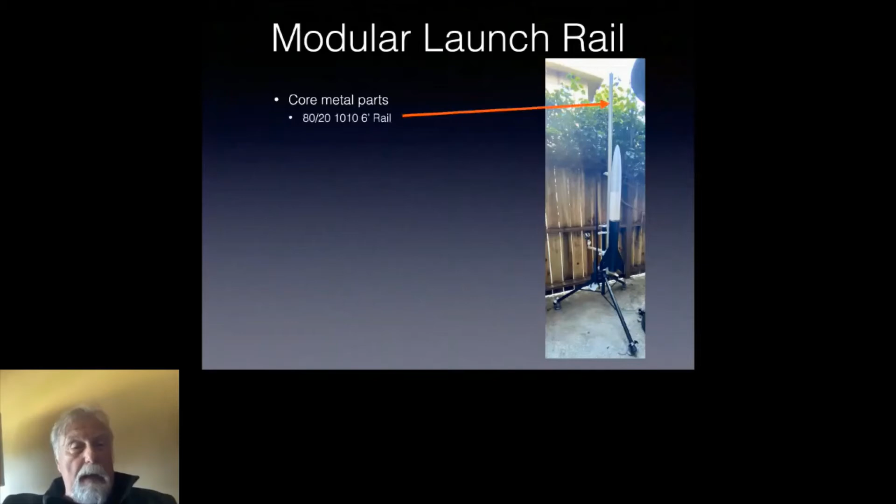So I've now built modular rail launchers for my TARC teams, my SLI teams, core metal parts with the rod clearly, 80-20 rails and MakerBeam 1010 micro rails.

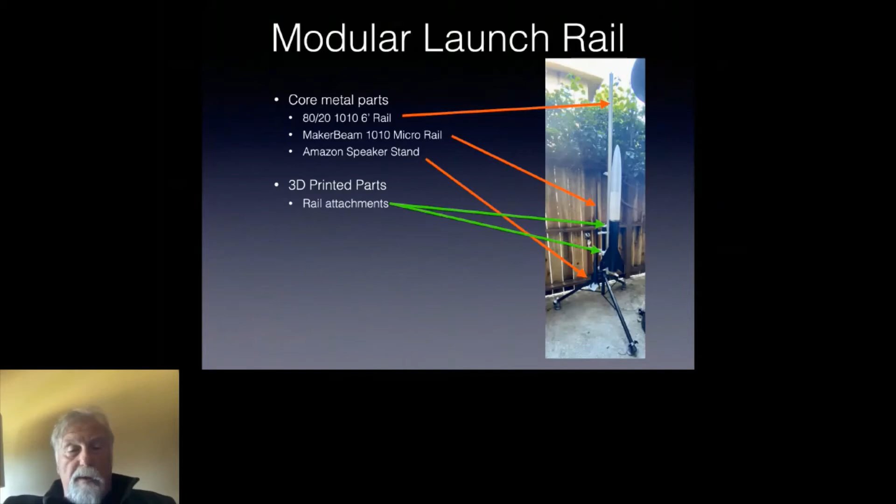You can add a simple $25 Amazon speaker stand with 3D printed parts for the rail attachments, the adjustable feet, bubble level holders so you know where you're pointing it, and a wireless launch controller, which is based upon another design for a telescope camera, 3D printed telescope, and a GoPro camera holder.

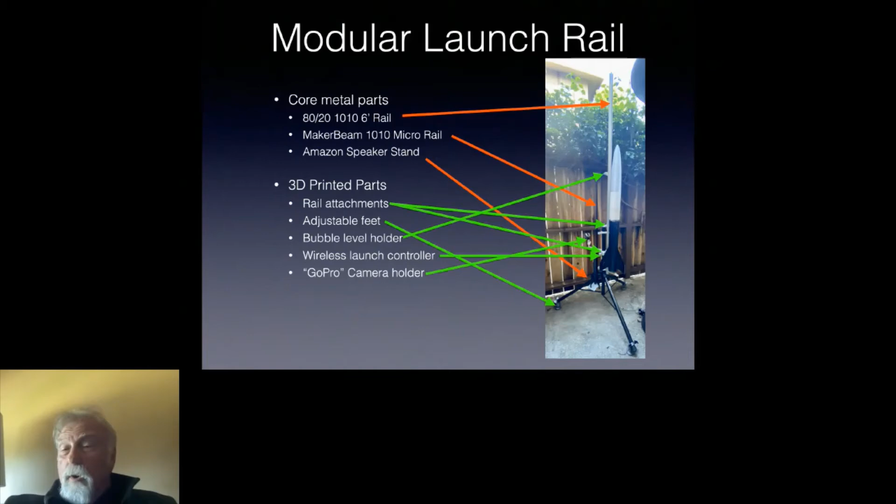So it's just fun. So then we can push the edge. So one of our projects at AeroPack and ARLISS is the ARLO Extreme, which is a two-stage. We kind of set the challenge in 2012, going 4-inch to 3-inch to try to minimize drag. And we generally stage at right around Mach 1.

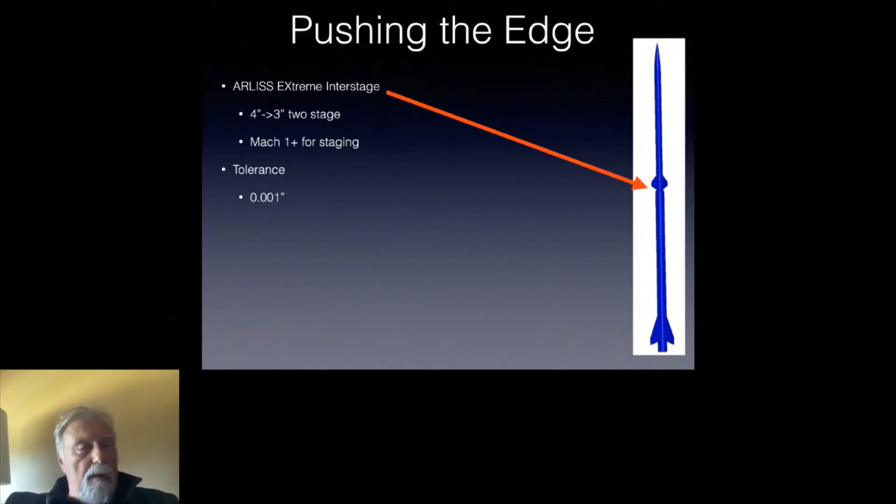The tolerance on our interstage is about 1/1000th. And we're printing it now out of MarkForged Onyx with embedded carbon fiber. And this is one of our first ones off the printer. We'll be flying it this summer.

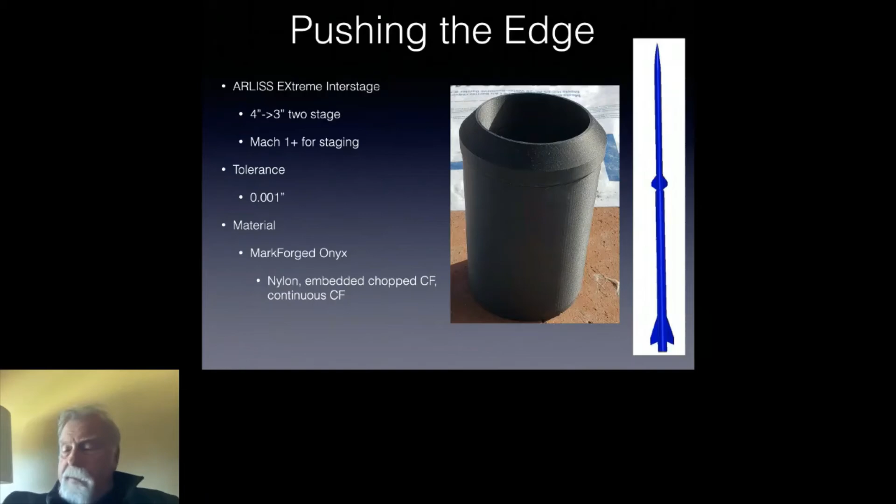So what are the next steps for me? One is to fly all this stuff because, as you can see, with COVID, I've been having, particularly in Northern California, no place to fly. So I've been locked up for a year.

We want to experimentally determine the edges of rocketry and 3D printing by both lab testing of strength and temperature, as well as taking it into the field to instrument our rockets as we fly them for reality. So we're particularly looking at the right materials for strength, temperature resistance, and comparing to more conventional parts. I'm kind of taking the lead on flight measurements, and my colleague John is going to be taking the lead on lab measurements.

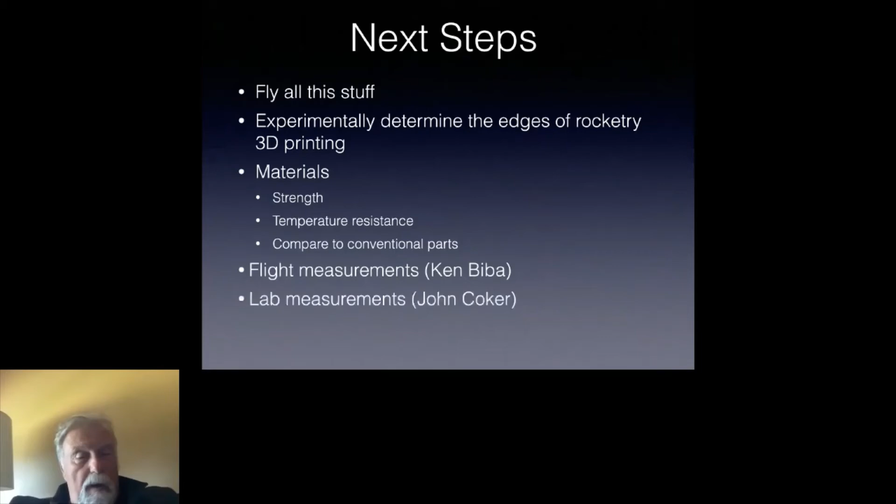So I want to argue to you that there is a new standard. And I grew up building things out of composites, vacuum bagging, and then earlier out of paper and plastic. I've now discovered that, particularly for low power rocketry, we can build complete low cost airframes.

So in my STEM work with more in the lower grades, we can build low cost airframes even with payloads that are inexpensive. They're less than the cost of the motors.

For mid-power rocketry, I'm a little suspicious right now that we can do airframe tubing well, but all the key structural components are there, which means that every TARC team should be busily building with 3D printed parts. And I've got 2 TARC teams in the finals, and both of them use 3D printed parts.

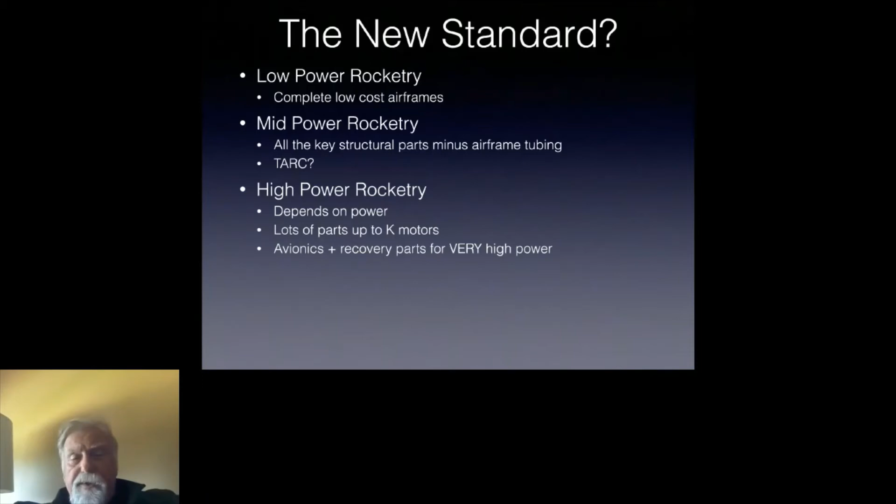For high power rocketry, I think it depends a lot on power and design, but I think lots of parts up through K motors and into M's. I use 3D printed for all my avionics bays. I'm beginning to start using it for more structural things. So this first project that I'm doing at 54 mil, with the first one, I'm really looking to fly transonic with fin cans and nose cones.

On our ARLISS Extreme project, we are still using vacuum bagged carbon fiber fin cans, but we will be looking at a new interstage that is printed with carbon fiber and impregnated nylon.

Are we at the end of shredding fins? I think one of the cool things is as we find the right volume, we can build complete fin cans that are not just slabs of wood, fiberglass, carbon fiber, or honeycomb material, but textured planforms that give us much better control of drag and structural strength. But it needs a large print volume.

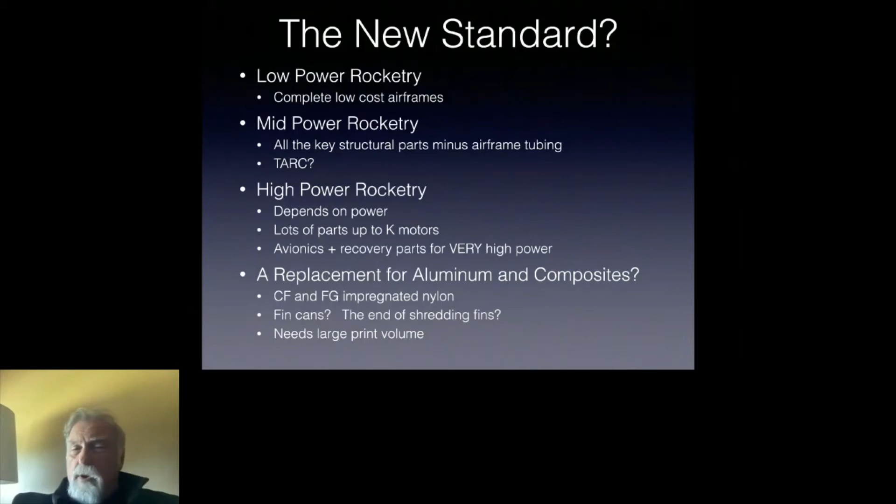So I'm going to conclude with some resources. First, system design. Most of you know OpenRocket, RockSim, and RasAero. I highly recommend RasAero for its power in drag estimation, but that's really only important supersonically. Subsonic, almost everything is good enough.

For component design, I happen to like Tinkercad because of my old age, it's simple to use. I can't say enough about OpenSCAD, and there are really great libraries on Thingiverse, or email me and I'm happy to give references, particularly for fin-can design and nosecone design, so we can custom design the nose cones we want without buying them commercially, adjusting fineness ratios and shape to optimize drag for the flight regime.

I happen to like Simplify 3D, but Cura works too. For printers, I can't speak highly enough of Dremel, and our first touch with MarkForged has been very good.

And then for prototypes, I like to borrow from the best, and I find there's lots of good things on Thingiverse. I'm posting some of my work there as well. I suggest looking at all these tools, the complete tool set you need to do great stuff. So I'll stop here and look for any questions.